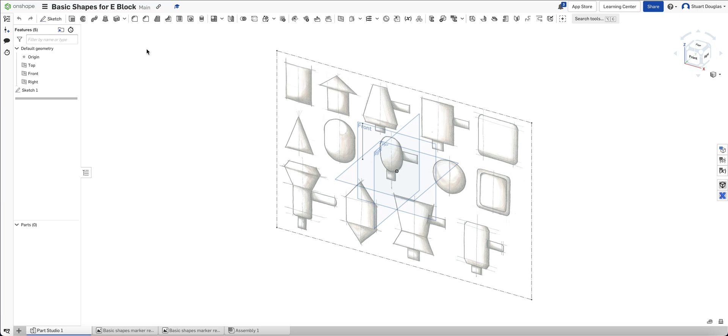In order to do that, what we need to do is firstly add a sketch onto this plane. So we're going to click on sketch, add the sketch to the front plane like we did earlier. Press N on your keyboard to present that in a 2D view, and let's zoom in.

If you want to create a revolve, what we always need is a center line. When we've sketched our shapes, we've sketched them with a center line. So I'm going to use a straight line, drawing it down approximately where the center line was, then continuing to draw half the shape.

So I want the bottom line here to be horizontal, so it snaps to be horizontal rather than trying to match my sketch, which won't be perfectly correct. Let's add a vertical line, which is what it wants to do naturally, then a horizontal line. My recommendation is not to join it to the top, but to go through the line, making sure it's horizontal, click once again, then press escape.

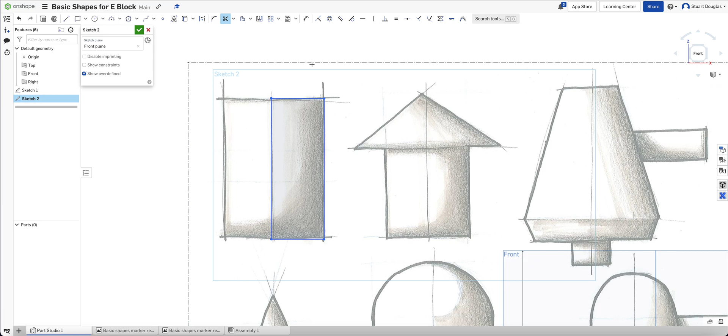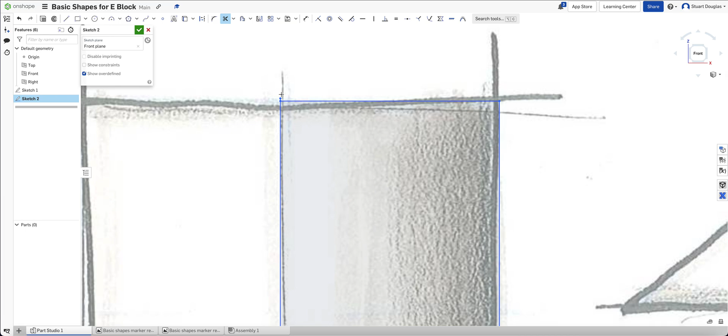Once we've got our sketch, we tend to trim it. So we use the trim tool and cut any stray lines off that we no longer need. This is what we need here as our section. Next we need to measure it. If I zoom in, you'll see there's still a little stray line - it's always worth zooming in to check for things like that. So I'm going to chop that away, leaving just my rectangle.

I'm then going to dimension it. If you remember, we calibrated the sheet at 70, so I'm going to change my measurement to 70. It doesn't seem to change because it's only altered the whole shape by less than half a millimeter. I'm then going to measure this line here, and now I want to try and make it a whole number. So I could go with 25, slightly smaller than the sketch, or I could go to 26 - that's down to you.

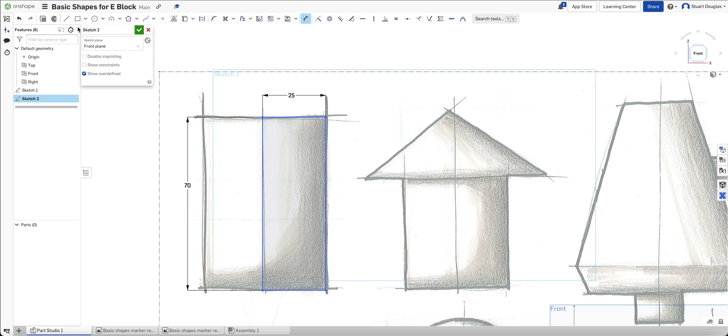Then I'm going to accept my sketch. I'm going to spin it round in 3D by holding down the right mouse button, and I'm going to choose Revolve. In this revolve here, we're on a solid revolve.

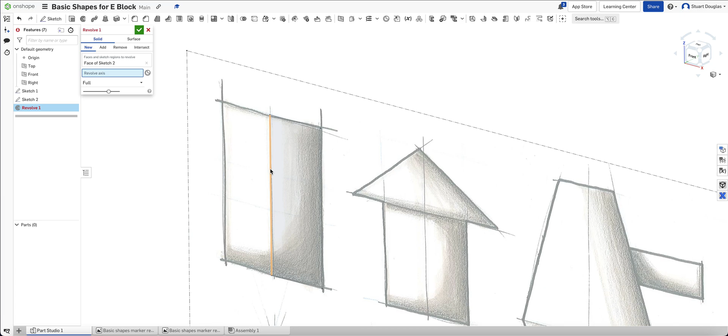We firstly need to pick the sketch, faces and sketches, so we'll pick that sketch. Now this has just turned red - this has gone blue, saying this is what we've selected. This is red, and it's asking where the axis line is. So we want this as our axis line. I'm going to click in it, click on my axis, and you'll see a preview like that, which shows it's revolving this section around this axis.

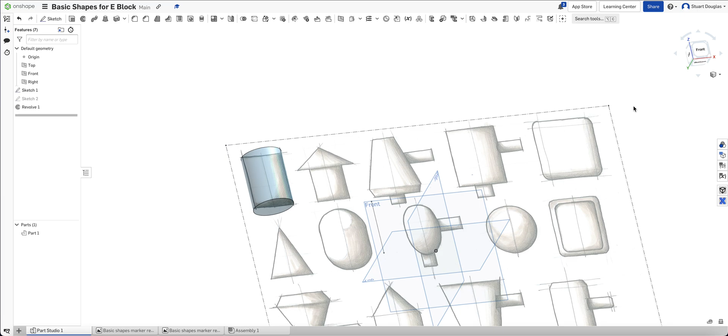So we'll accept. Now I'll show you one of the slightly more complex ones. We'll put our work to the front here so you can see it, and quickly model something like this - a new sketch on the front plane.

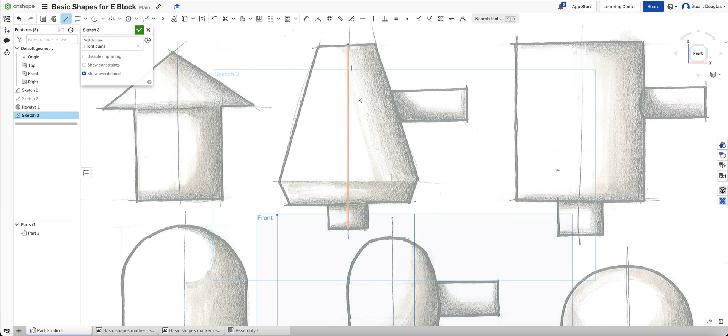Let's add our sketch in. Remember, we start with a center line, so I'm going to draw a center line all the way down to the bottom there, then press escape and come out. Then I'm just going to pick lines that I want to cross my center line. I'll click one here, drawing a deliberately horizontal line going across it, then press escape and draw another line.

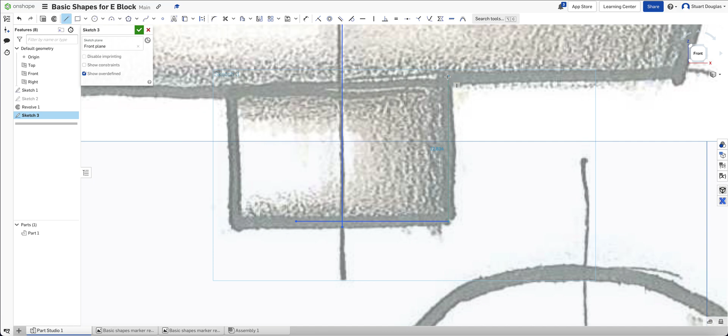So I could press L on my keyboard. Now I'm going to go up approximately - again I want that vertical line, then we'll go across for a horizontal line. I'm going to zoom out, go up approximately, perhaps here. Remember, we're going to dimension this afterwards.

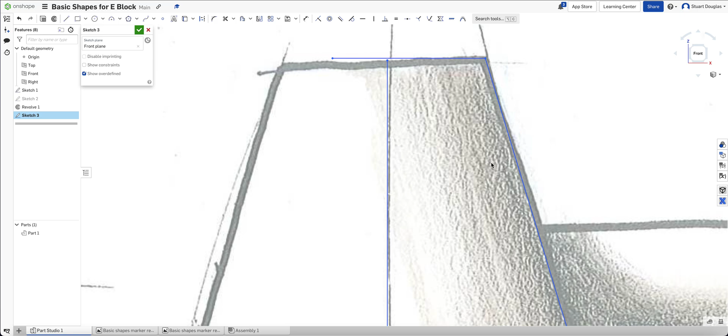Now, I don't try to draw this part because this is a separate extrusion. So let's go through my work, press escape, and now we can zoom in. Notice here at the top that it's just missed, so I can do one of two things: either extend this line or reduce this line. So there's my decision, then I'm going to trim my shape.

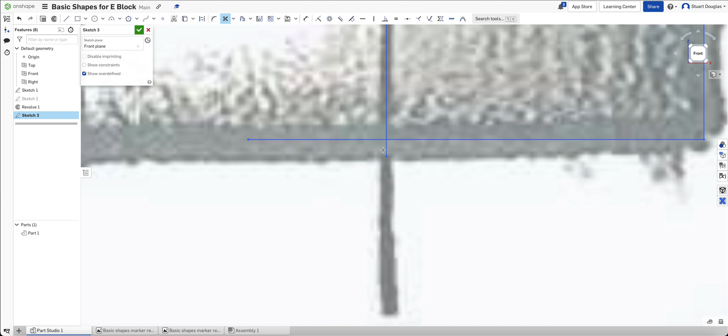So let's trim this line, cut those away. I'm going to zoom into the bottom - there we go, trim those two. Let's come back out, I'm going to accept my sketch, choose Revolve, and revolve around my axis just like I've done previously.

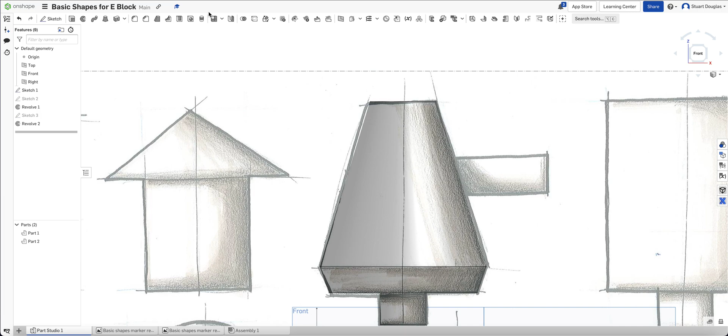So let's accept that. Then I want to draw this cylindrical part. For this one, I need to do a new sketch, but this time I don't actually have a center line on here. So I'm going to sketch again on the front plane, drawing a straight line approximately where the middle of this will be.

I'm going to go into my work - there's a horizontal line, let's go down, across, and up, like so. Now what I'm ready to do is revolve it, but just before I do, what I didn't do with the other one was dimension it. I'm going to show you how you can change that, making this a little bit more precise with my measurements.

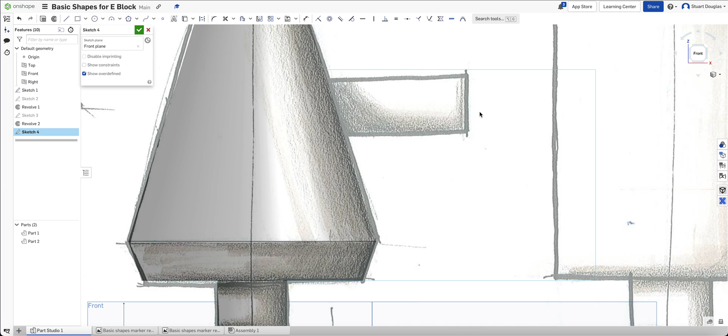If I press escape, I can always move it a little bit by hand if I wanted to, or click undo if something goes wrong. As you see, when I try to move it there, it disappears, so let's undo that. See if I can move that one - there we go, we'll just move that one out of the way. So let's accept that, and revolve, spin it round.

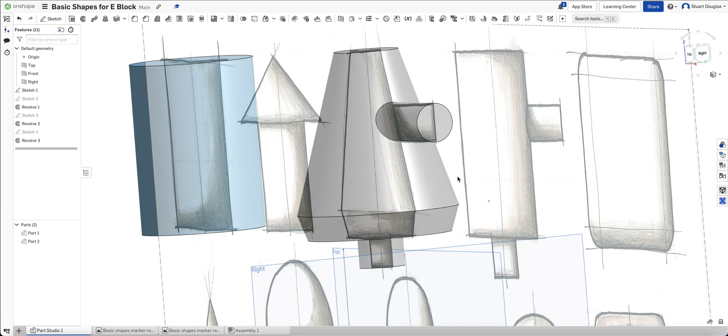What do I want to do? I want to revolve that, but this time I'm just going to revolve it, picking one of the edges. And let's accept - and now you can see, okay, we've got our shape.

One of the things we can do is go back to our sketch here, sketch 3. If I right mouse click and choose edit, I can zoom in, press the dimension tool, and then individually change and dimension parts. Accept.